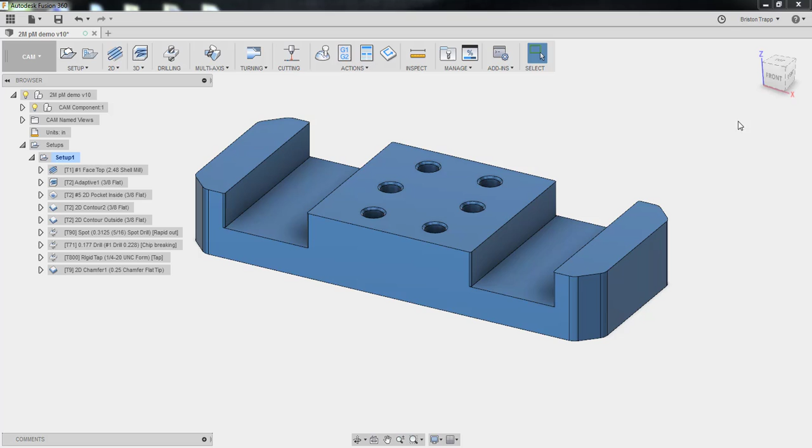We're going to start with a new setup. We're going to spin our part around so the bottom is facing up. We need to reorient our Z by clicking on the tip. The Z should now be pointing up, X to the right, Y back to follow our right hand rule.

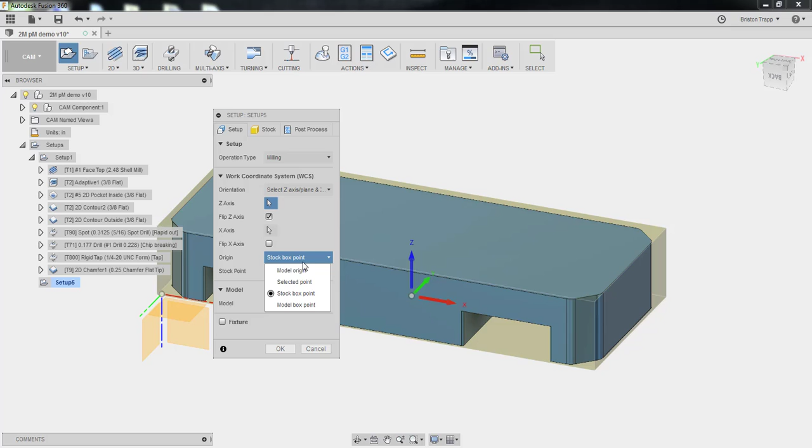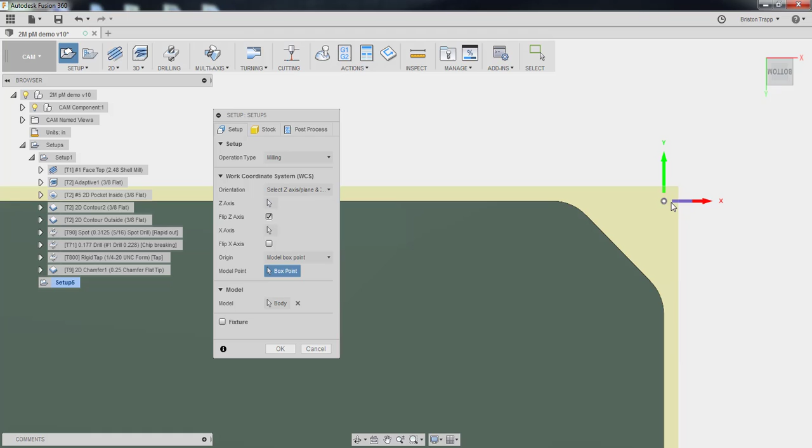Our origin is going to be based off of the model box point, and we want this right back bottom box point. Notice it's not on the part and it's not on the corner of our stock. It is basically an extension of this Y plane and X plane right there at the bottom.

The bottom is going to give us a consistent surface to probe off of. It's actually going to be the top of the parallel. We don't want to probe off our stock because that might provide some inconsistencies with different stock sizes.

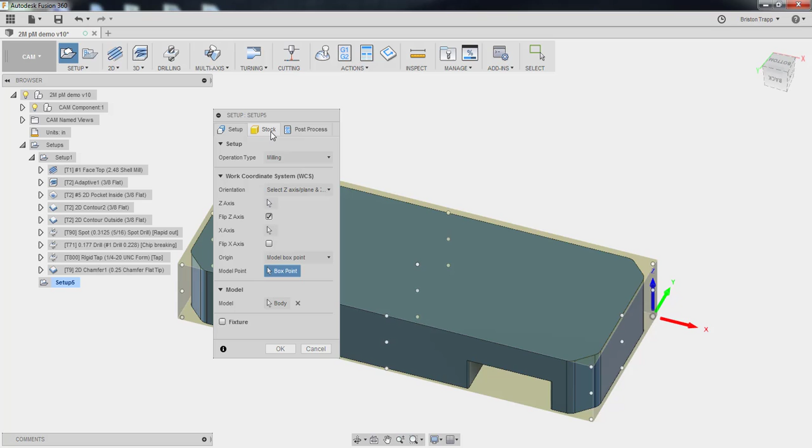Our stock tab is going to be fixed size box. X width is 5.1, Y is 2, Z is going to be 1 inch minus 0.03 because we faced off 30 thousandths, and it's going to be offset from the bottom,

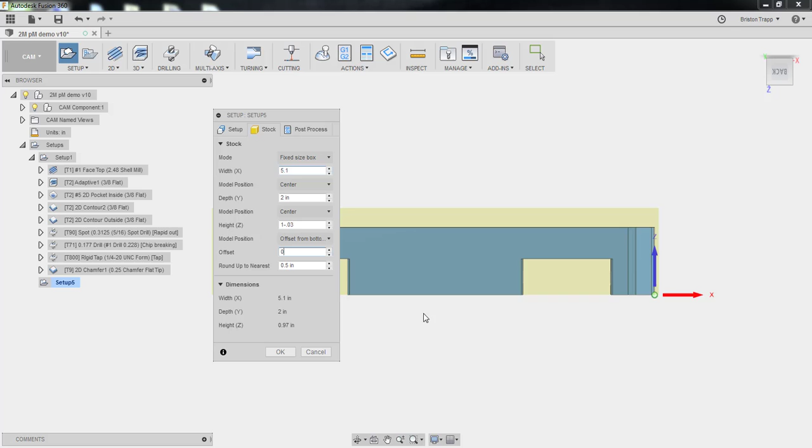offset 0 inches. That will push our model all the way down to the bottom of our stock, because remember, all our stock is up here on the top. We do show stock here and on the side, but we're just going to ignore that because we know that that is not there.

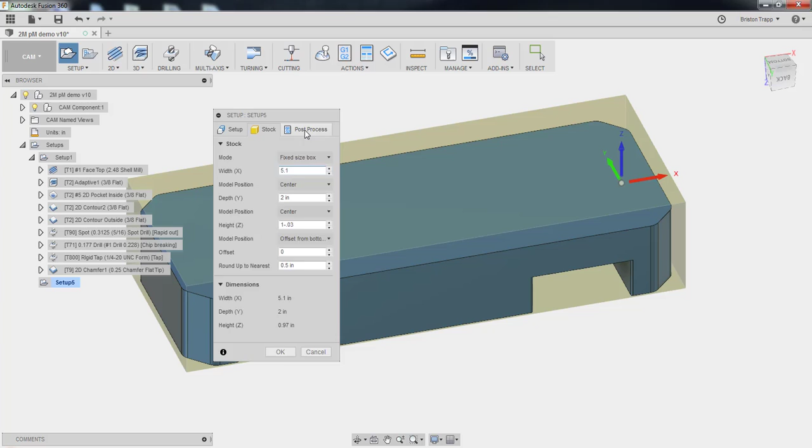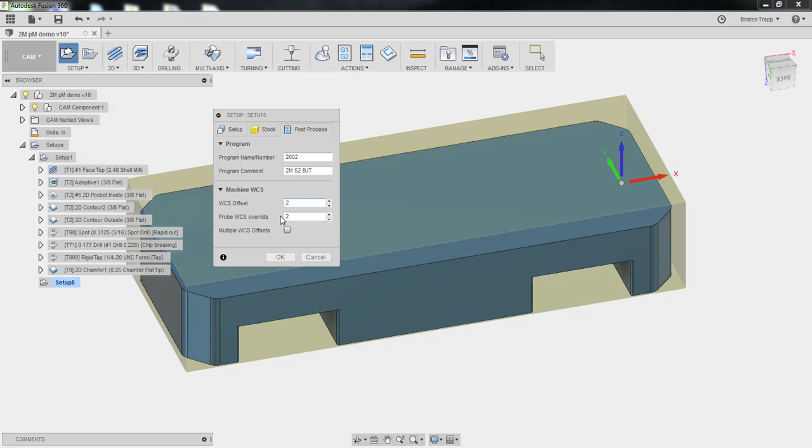Under the Post-Process tab, this is going to be 2002, Program Comment 2MS2 for Setup 2, Initials, and the Work Coordinate Offset number is going to be 2 because we'll be utilizing G55 for the second setup. Click OK.

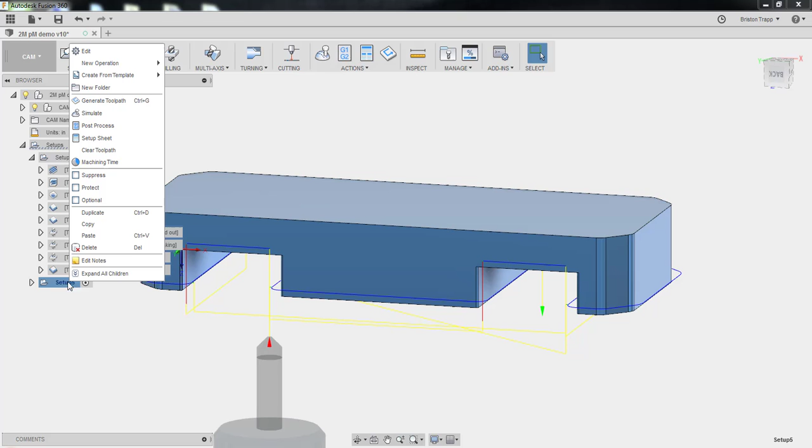To remove the carrier, we're going to do a facing operation. We can take our facing operation from setup 1, right click, copy, right click, paste, and we can also take our chamfer operation, copy, and paste. Notice this bubble means that this is our active setup file.

Right click, edit. We're not going to be facing there, we're going to be facing on the top. We're going to turn coolant on to flood, removing a lot of material. It's going to go a little bit slower because we're going to go a little bit deeper, so that's going to be 60 inches a minute for our cutting feed rate. Still same RPM, lead in, lead out are fine. Still tool number 1, the face shell mill.

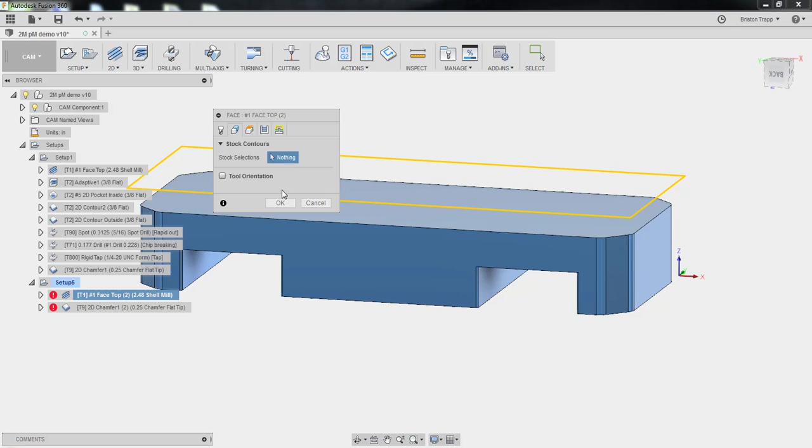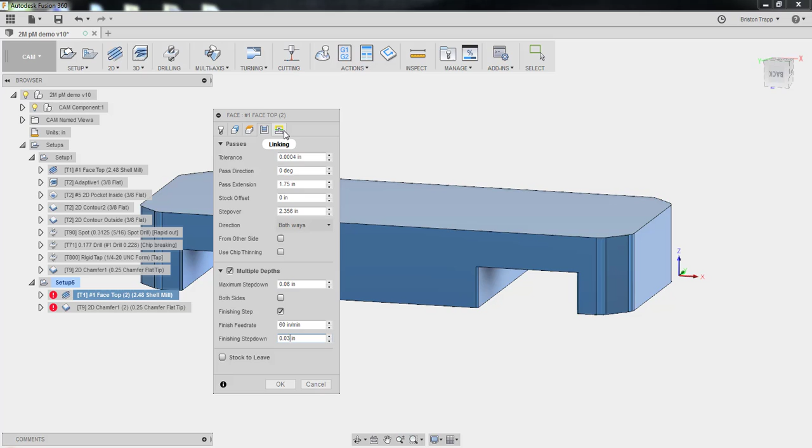Geometry should look like that. Nothing to really select. Heights, those are fine. Passes. Main thing on this is we want to do multiple depths. We're going to go down in increments of 60 thousandths, 0.06, and we're going to have a finished depth that's going to be 60 inches a minute at a depth of 30 thousandths. Linking, everything is fine. Click OK. And you should have a multi-layered facing operation.

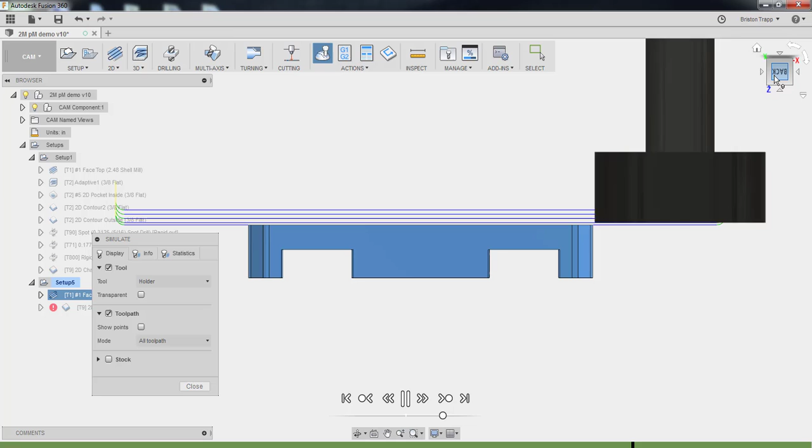We cannot remove all the stock in one pass. We could remove a deeper amount if we go slower, but we're going to keep it at 60 thousandths depth of cut, 60 inches a minute.

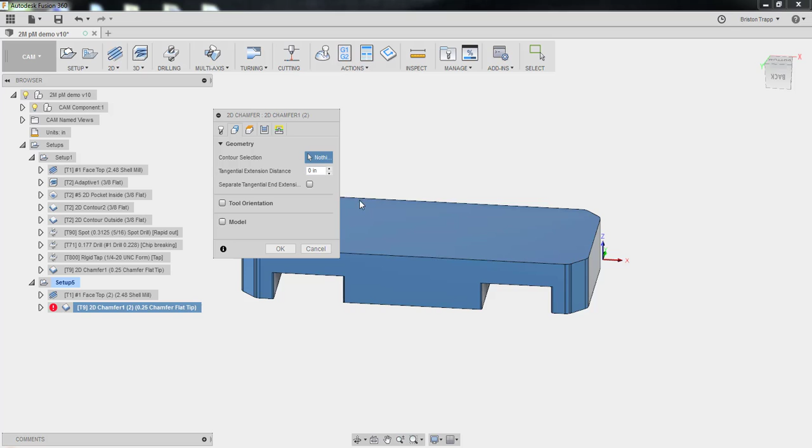The chamfer operation, simply just need to edit it. Same feeds and speeds. Geometry, we need to deselect the previous geometry and select this outside edge, arrow on the outside, and everything should be fine. To simulate, facing operation, and then our edge break chamfer of 10 thousandths.

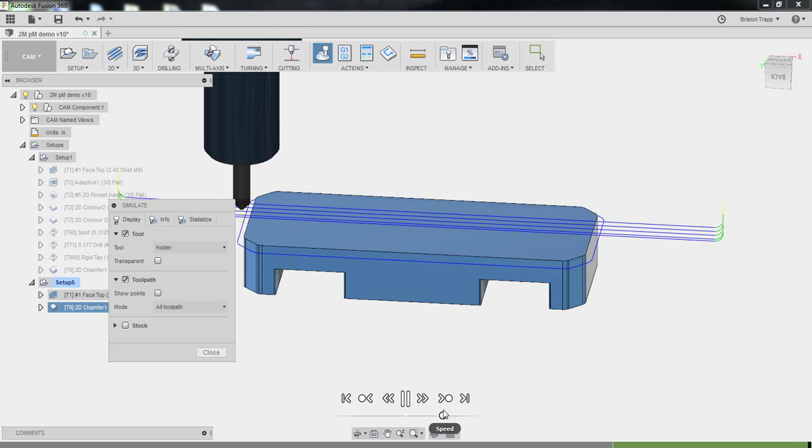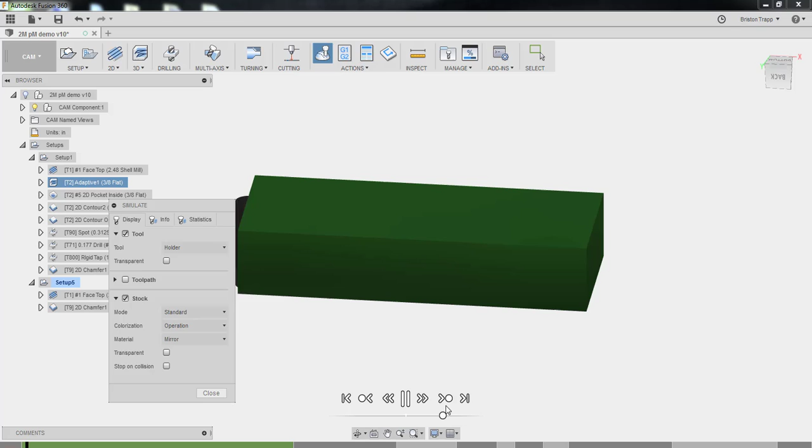Close. If we simulate the entire setup, turn off the model visibility, turn on the stock, I'm just going to get rid of the toolpath. Face, 3D adaptive, finishing. And then here's setup 2.

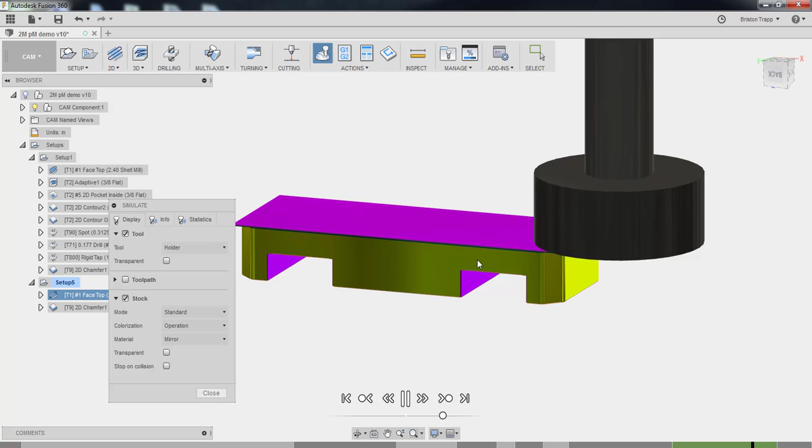The feed rate and depth of cut is also determined by the work holding. We're going to be in the hard jaws on parallels, so we can hold it pretty aggressively. And that is Titan 2M setup 2.

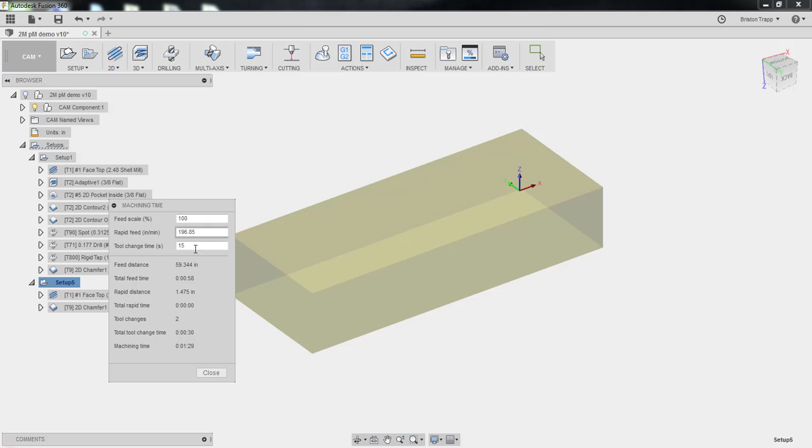Now I just need to make sure your tool numbers are correct, tool 1 and tool 9 for the standard mini mill. Right click. We can check out our machining time. Looks like we're at 1:29 seconds.

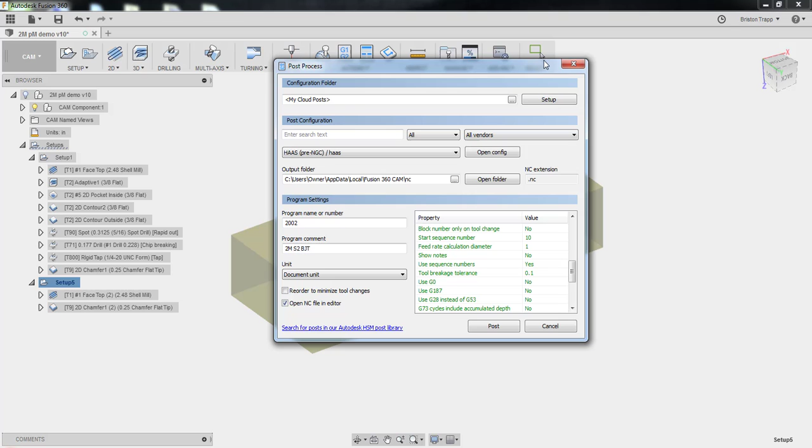And post process under the Haas pre-next generation control with G187 to no because it's not used during this operation. Post. Save it on your flash drive.

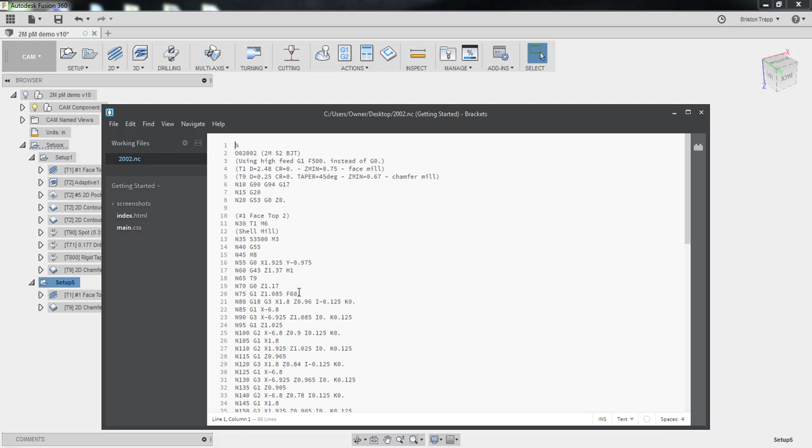And looking at our G code, we're going to use tool 1, tool 9. We'll be referencing G55, shell mill 3500 RPM, feeding at 60 inches a minute. Notice this only has about 85 lines of code, relatively simple.